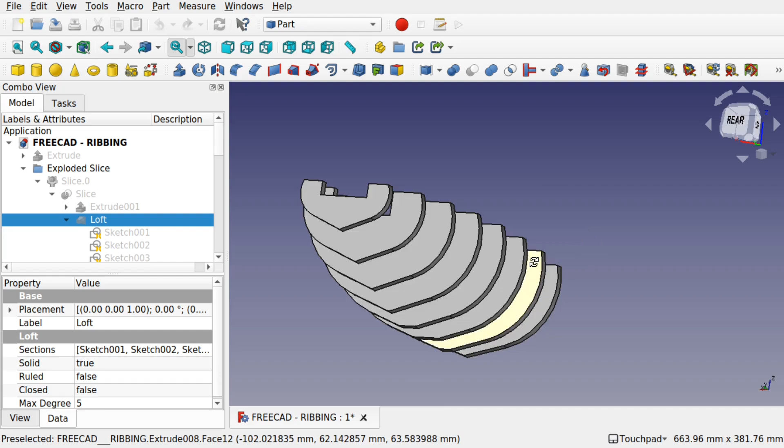Hi viewers and welcome to the channel. This is a follow-up video for the parametric ribbing that I did for one of the hulls or fuselages. This was a previous video that was uploaded where we created a boat hull and created a number of bulkheads from parametric cross sections.

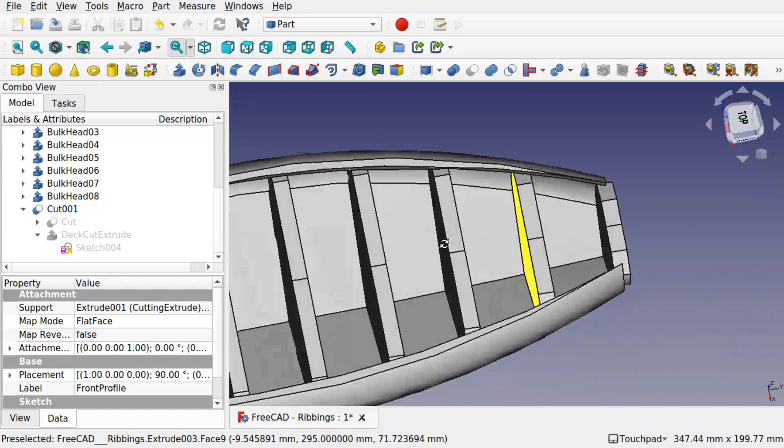There were a few questions. The first was regarding an offset. At the moment, if we 3D printed that, those bulkheads or ribs would actually be on the outside surface, showing through. We need to offset those back, and I'll go through how to do that. Another question was about chamfering each of the cross sections in one go. I'll be recreating the model from scratch, renaming each part so it's easier to follow, and showing you how to cut the top surface to expose the cross sections underneath.

There are some more questions that I'm going to address in another video. I just didn't want this video to be too long. So thank you for those questions, and let's see if we can tackle them.

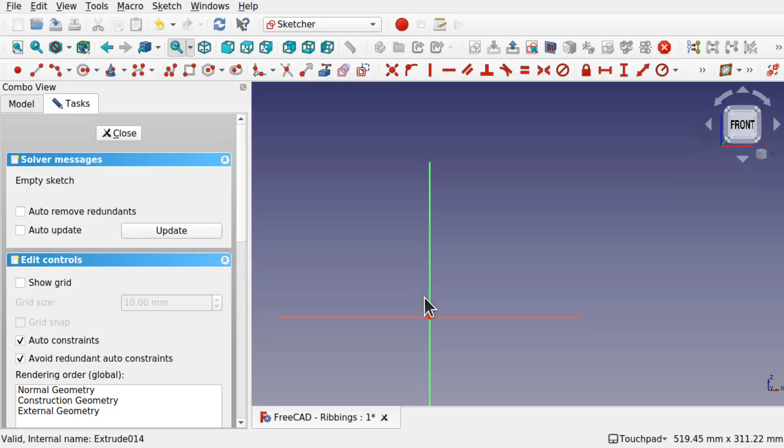On the XZ plane, hit OK, and we're going to create the cutting tool. This is just going to be a rectangle that's going to be the length of the boat. Hit escape, and we'll place some size in here. I'm going to set this one to about 200 millimeters and set the height to 100 millimeters.

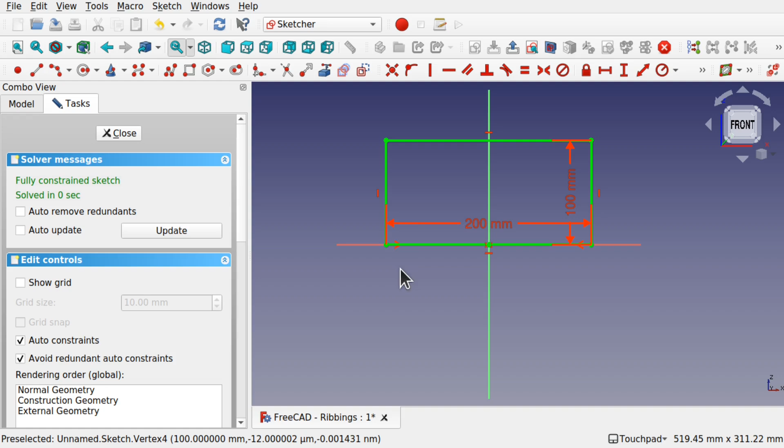This is what we went over in my previous video, and we're going to set those two points symmetrical to that center point. This is attached there, so I don't need that - click on it and delete that. There was a constraint because it was constrained to this line due to auto constraints being on. Just delete that constraint out of there. Hit close, and we've got this rectangle here.

If you want to go back to the other video, you can, just to go over that. But I'm just going to go through this quickly to create the necessary objects. Go over to the part, and we need to extrude this way. Let's give ourselves a bit of space. So extrusion along the y-axis.

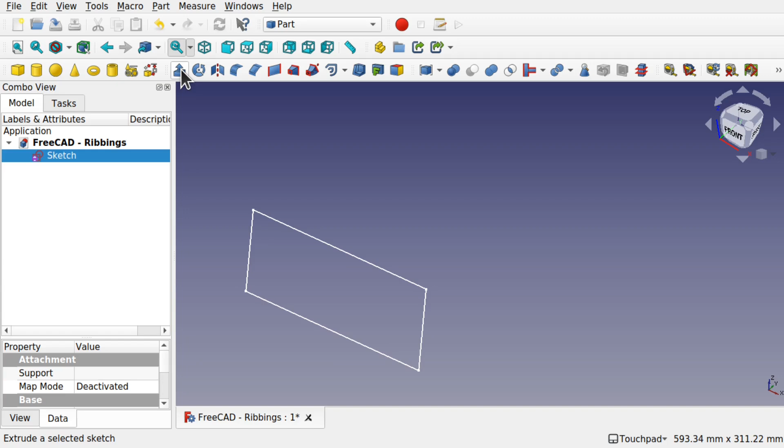I've had the sketch already selected, and we can come down and check that - you see shape sketch there. Click the y-axis, and we're going to extrude about 350 millimeters in that direction. This is going to create our cutting tool.

I'm going to rename these as I go. So this is with the boat - this covers the boat, so I'm going to call this boat coverage. We're only going to be using this once anyway, so this is our main extrude that we're going to create the cutting tool from.

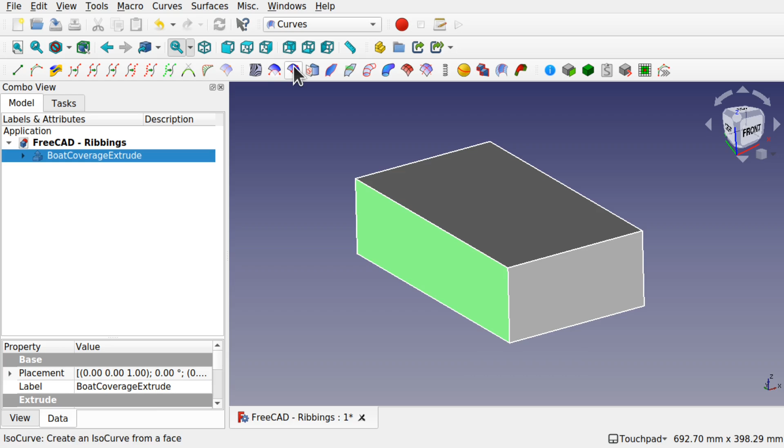Click on the side. We need the curves workbench installed. If you haven't got that, you can go over to tools, curves workbench - I've already got it installed, so tools, add-on manager there. Click on that side, click once so this face is selected, and create something called ISO curves across there. So our ISO curves have been added.

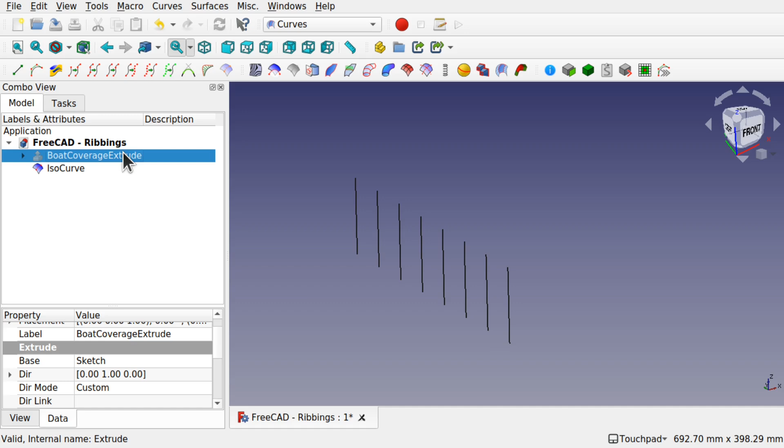This is a compound object, so I can click on the ISO curves and change the U to 0, and you'll see we just get the vertical lines. I'm going to up this to about 8. This is totally separate from the main extrude, so I can click on the main extrude, and we've got a compound set of lines there as one object, a number of edges. So with lines or edges, we can extrude them.

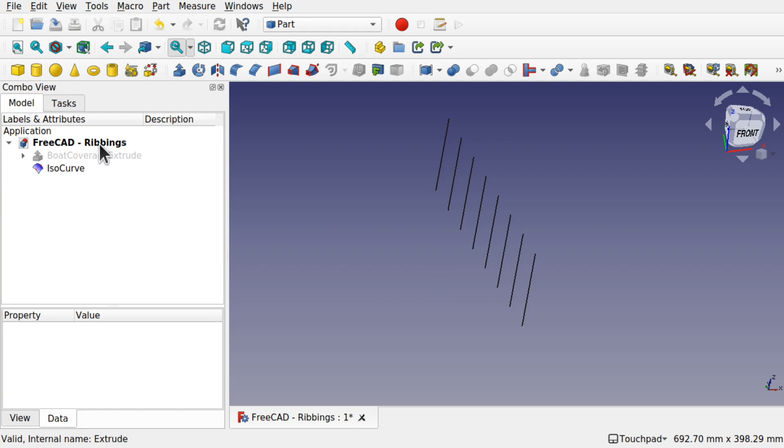Come up to the part. We're going to extrude this along the x-axis to make the ribs or the sections, bulkheads, etc. Click on the IsoCurve, and we'll extrude that along the x-axis, making sure it goes in the same direction - so 1, -1 this way, 1 this way, point of origin -1, 1. The length will be the width of the boat, which was 200 millimeters, and we've created our stations for the extrusions, which we'll use as a cutting tool.

So we've got the extrude there. I'm going to rename this cutting extrude.

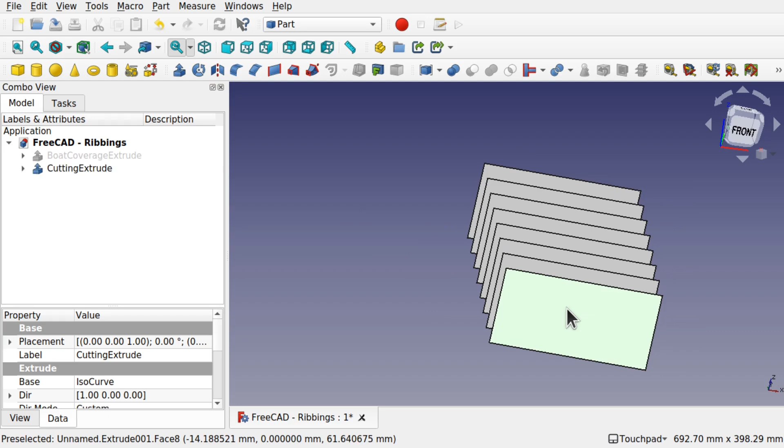We're also going to use this to sketch upon. I'm going to click this face here, click on the front, bring this in, come over to the sketch workbench. I'm going to attach a sketch to this, so make sure it's selected. Only select it once, otherwise the whole lot will select. So just select that one there. And we'll create a sketch along there. Make sure it's a flat face, okay, and this is going to be the profile of your boat. So I'm working across the whole of this rather than the half breadth, and whatever profile you want to add, make sure you keep it inside this area.

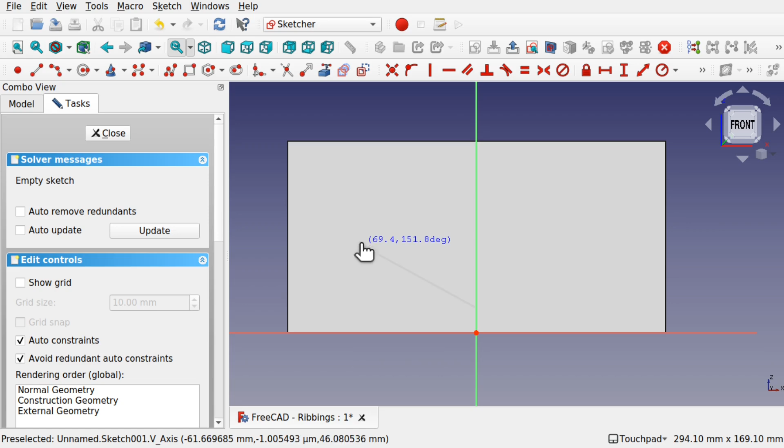So whatever method you feel comfortable with making the profiles. We will go through side profiles, doing this from the side view as well, perhaps in another video. We'll keep to the questions asked in this video first.

So we've got constraint substitution because I've got the auto constraints on, the avoid redundant constraints, and we'll just substitute that constraint there because I'll create a tangent against these two. Create a line, click on this point, create a line, and that line there. It's not attached to this one, and that's because I want to create a mirror across here.

So select all of them, the box selection, come up to the mirroring. Well, first of all, we need to select something to mirror over, so this center line can mirror over. Come up to the mirroring, and we'll mirror across there.

These two points need to be connected together with a coincident constraint, and this point needs to be connected against the center line with a point on object constraint. These two, because they've been mirrored, will be separated. So this point and this point connect together.

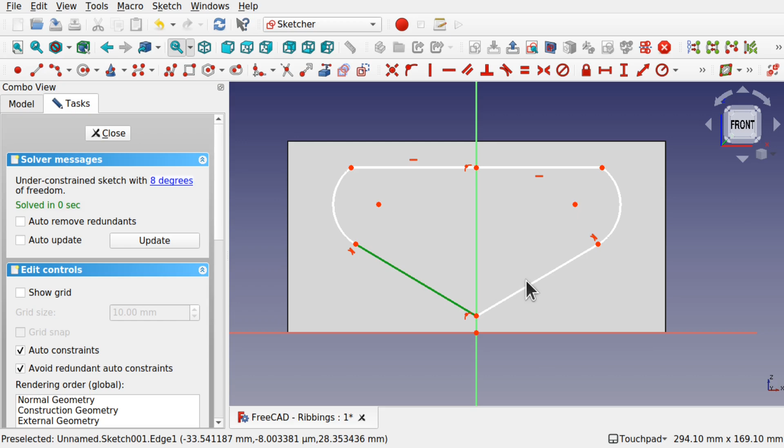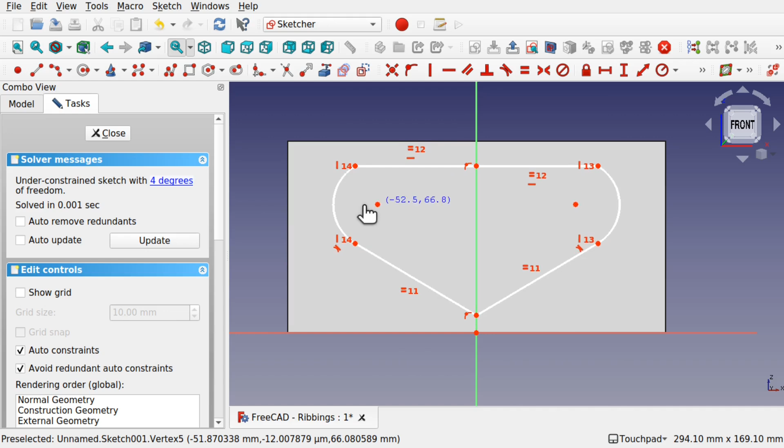Going to make sure that these two have an equality, so use equals, and these two also have an equality. And we'll take this point and put them in a horizontal constraint, and the same with this point and this point, horizontal constraint. So that means if I move these now, they will move together, which is what I want. Make sure it's inside of here.

Hit close. That's the first sketch done. So that's attached to there.

Now I'm going to duplicate that sketch. This is the back. Let's rename it first, back profile. Now we can either come into the sketch, come up to edit, duplicate selection. What it's attached to, it's attached to the cutting extrude. Just uncheck that and that will leave that back profile there.

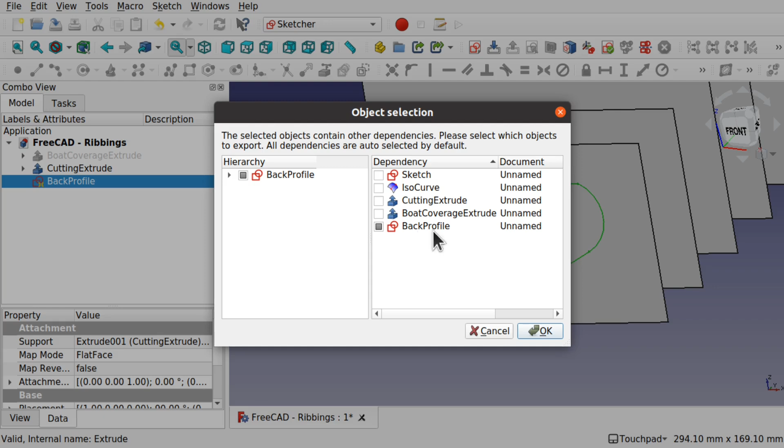Or we can disassociate it with this face by clicking on the back profile and the support, coming into the support, clicking on that, and hit clear and hit OK. Because I've disassociated it with that support, you can see that's clear now. I can click on that and hit edit, duplicate selection. It'll just duplicate up. So edit, duplicate selection. I've got 3 of them.

This one's going to be the middle. Right click, rename middle profile. And this one is going to be the front. Right click, rename front. We're going to change what they look like in a minute.

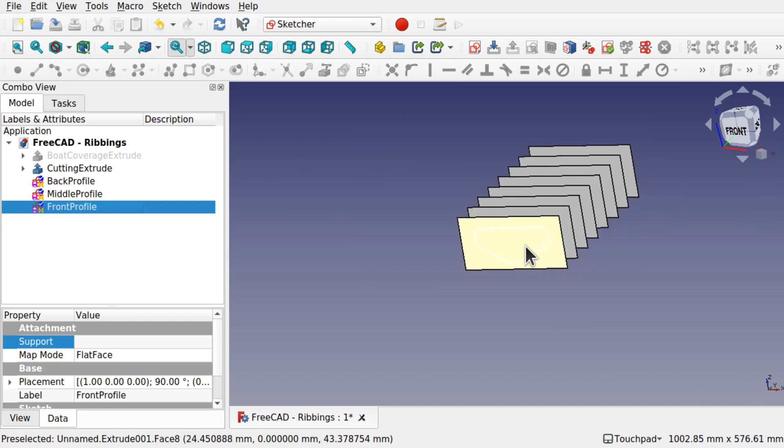Now we associate them with the stations. So we take the front, click on the front, the support, click on the button, and we'll move this over to the left and click that front support there. Hit OK, and you can see there's a sketch on that face now.

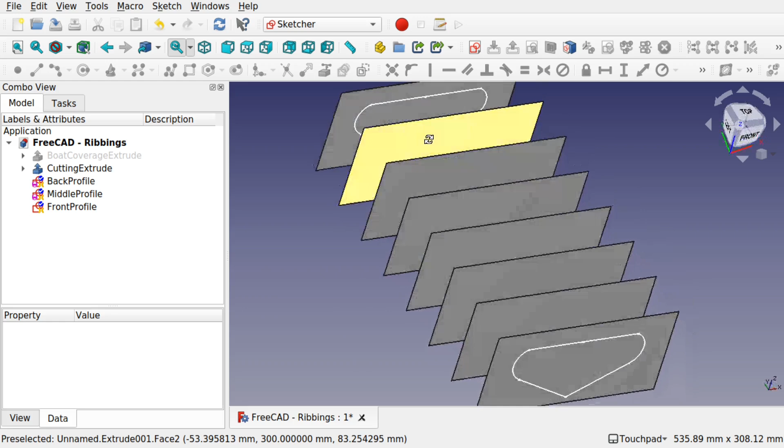We'll do the same with the middle, support, and where we're going to put this one, I'm going to put it about here. Okay, that. So we've got those 3 going along there.

Let's change these slightly now. So I'm going to come to the front profile, double click on it, and we'll come in. And we can't see that at the moment because we need a section view. There we go.

And we'll change this. So I'm going to push it up. I'm going to bring these in as well. So I'm not dealing with the point of the boat. If I wanted to be dealing with the point of the boat, I'll create another one behind here and have it going into that point.

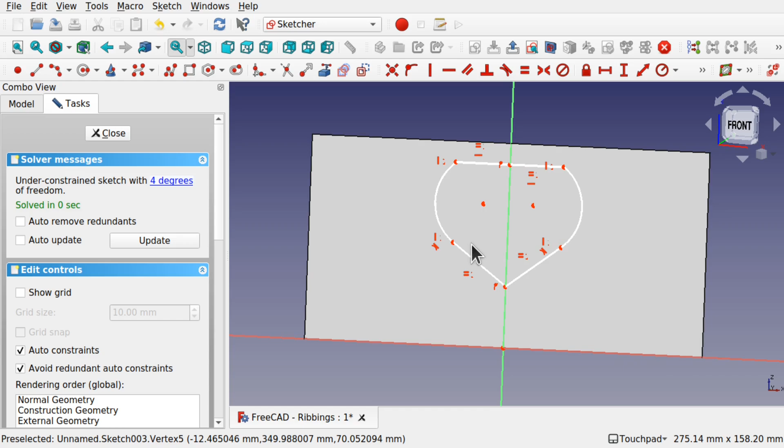Hit close, so we've got that one there. Might be a bit circular, but that's fine. And what we're going to do is take this middle one and change that slightly as well. So section view, I've got this one here.

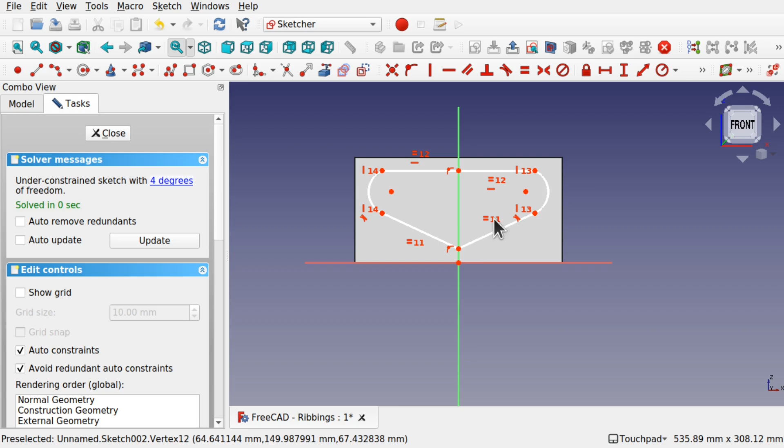Just bring this up a bit wider. There we go. So we've got medium, wide and small.

Now this is where I created the loft before going through here. I'm not going to create a loft going through here just yet. What I'm going to show you is how to offset these, because we're going to create two lofts: the outside and the inside loft.

Click on the back profile. So we clicked on this one, and what we're going to do is move this inwards, offsetting it by creating another object from this one. For that we need the part workbench.

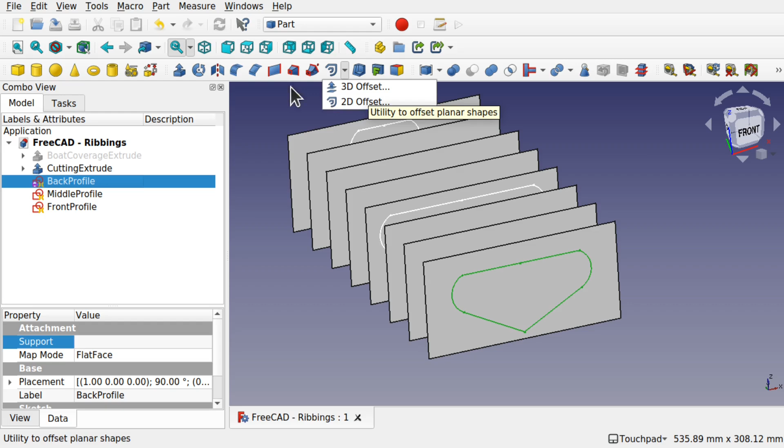Now I'm in the part workbench, I've got that back profile selected. I'm going to use this icon here. When you come in, it's normally set to 3D offset, but we're going to use a 2D offset, also available from Part, 2D offset. This creates a 2D offset.

If I set it to a minus value, it goes inwards. We'll increase this by about 3, and you can see that offset in there. If I zoom in, you can see that there.

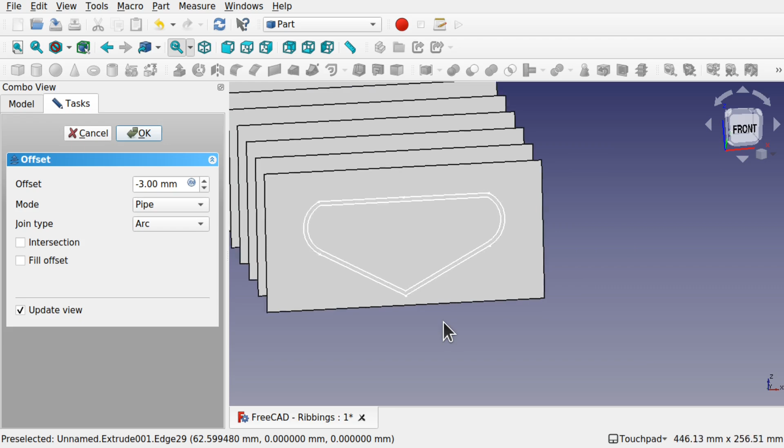So what we'll do is create a loft with the outer and a loft with the inner, but use this cutting surface to cut the inner loft. Hit OK. That's in there.

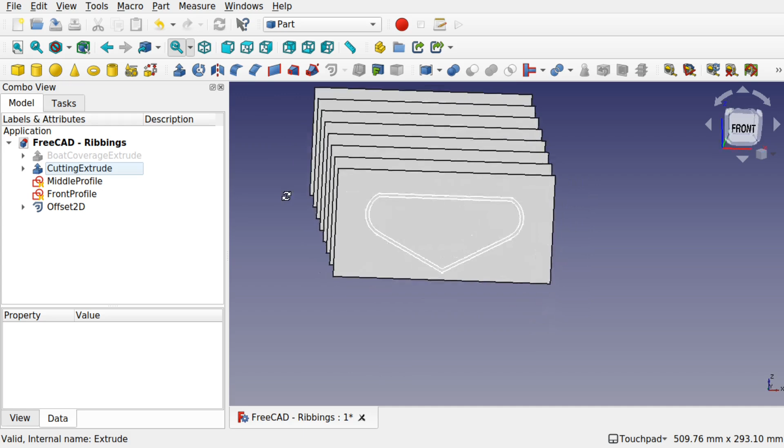We can do it with the other shapes now, so we come around and have a look. So we've got this one in here. We can click on that one, or click from the middle profile here, and use this tool here. Set it inwards. You can change these to whatever you want, even change the offset so it differs from the previous one.

The arc and tangent options mean that if it's arc, you'll get more curved offsets, so if the edges connect, they'll be curved. Tangent means they will follow the original offset.

Okay, and we'll do the last one. I should be renaming these as I go. Let's rename the last one, this one here - offset - and we're doing -3 on there as well. Okay, so we've got this one.

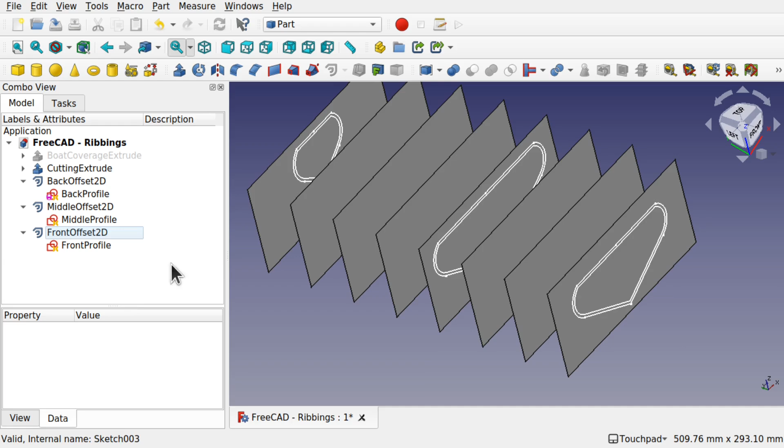So what we have now is a cutting tool, a back offset, a back profile, and the same for all of the rest. So if we expand these, so we see them all, we're going to create lofts through here now - two lofts.

Click on the utility loft and bring in the back offset. So we'll do the offsets first: middle offset and front. And we'll create a solid from those. Hit OK. That's our first loft - this is our inner loft.

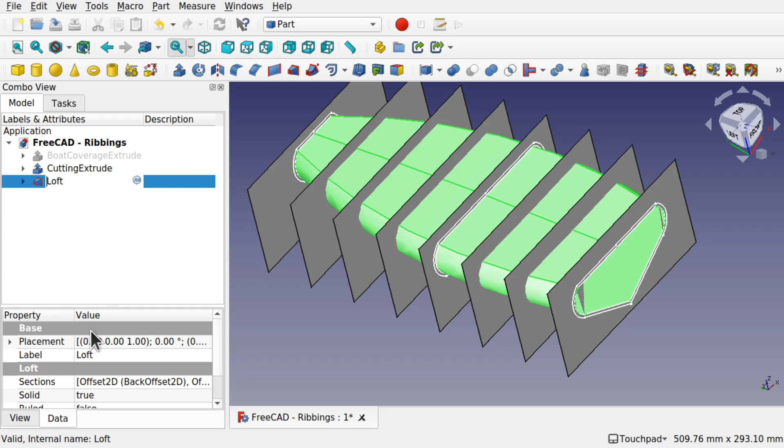Now nesting inside the inner loft, you'll find the offsets. We're going to press the spacebar on these offsets to hide them. And nesting inside the offsets, you'll find each of the original profiles - the back, middle, and the front. Just going to keep those visible for the time being.

I'm going to split the inner loft now with the cutting tool. So select the cutting tool first, then control select the inner loft. Come up to Part, Split, Slice Apart, and we slice those apart now into the exploded slices.

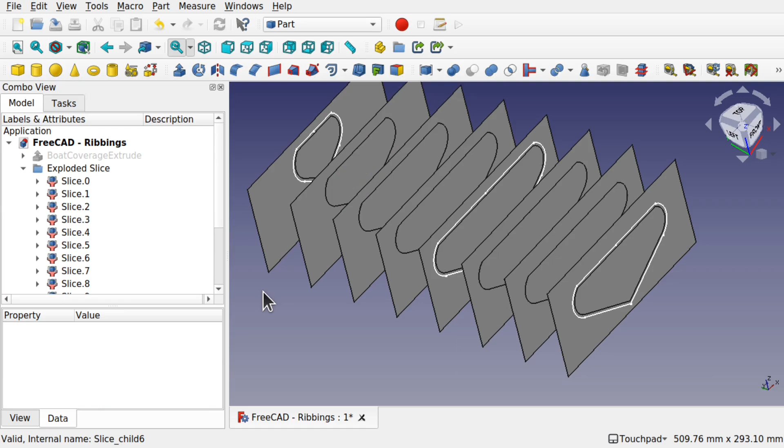And you can see that we've got all the faces inside there. We can control click all of these because these are the ones we don't want. Like so - press the spacebar to get rid of all of those exploded slices.

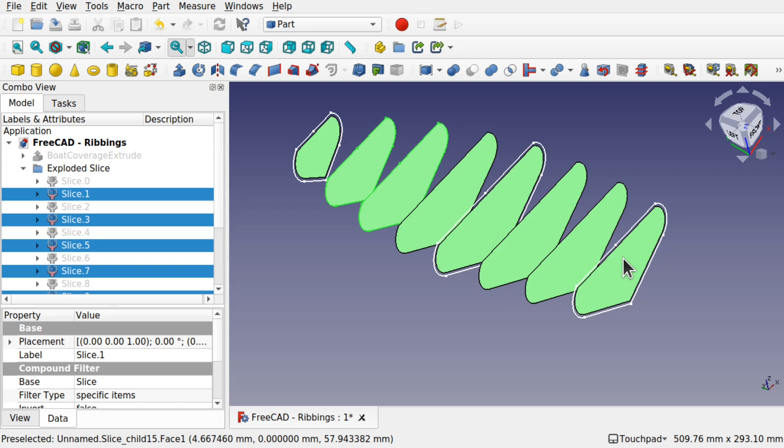If we select the others, so the inner parts, we can control select them from here, or control select them from here. And we'll extrude those along the y-axis. Go for 10mm. We can do symmetrical, so they sit over here if you so desire. Hit OK. Those are all in there now.

So let's hide those exploded slices, and we've got these individual extrudes. We can name these bulkheads, ribs, whatever you see fit. So I'm going to quickly rename these now.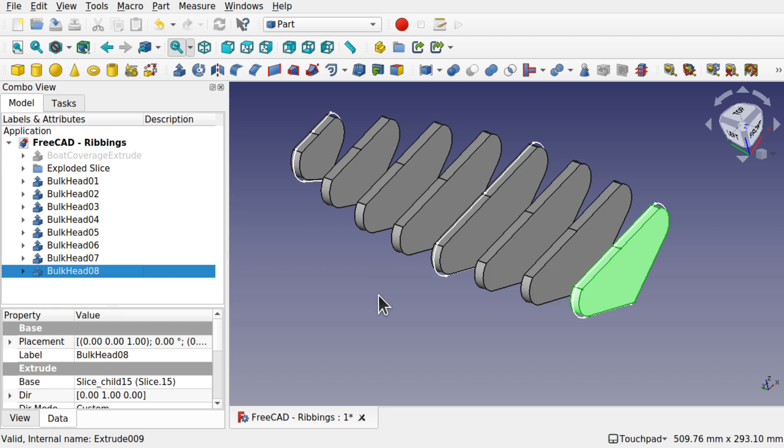I've just renamed all the bulkheads, and we can still see the sketch inside there. If we come into the bulkhead, you can see we've got the slice and we've got the inner loft that sits inside there.

Now this is where the problem comes in, because that loft, if we wanted to 3D print this with these inner parts, and if we take a section out here so we can see these ribbings going across, then these are going to show through. Or if we're trying to make an actual physical object out of this, then these are going to poke through. So how do we solve that?

Well, we're going to extrude the actual original sketch, because we created the sketch from the bulkhead, which was part of the slice. See the slice in there, got the inner loft in there. As you see in bulkhead 01, 02, this will be the same in all of these - the slice, and then the slice again, and the inner loft. So that inner loft is the same object throughout.

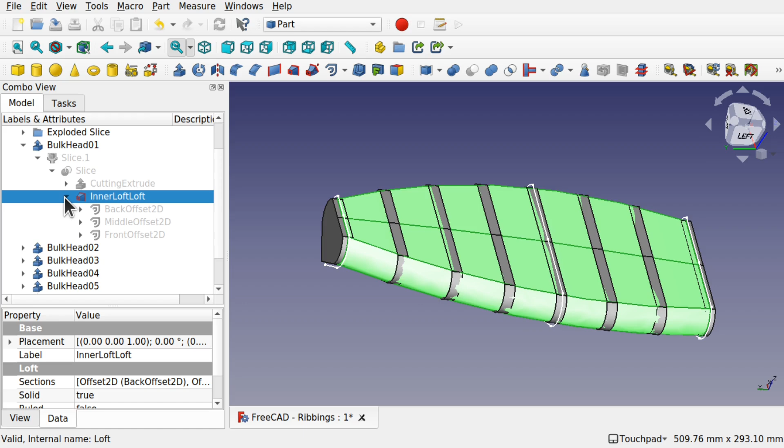You can see when I press the spacebar on it, it just disappears. So just pick one - I'm just going to pick bulkhead 01. Extend it out, extend out the offset, because the offsets are in here. You see the sketches are in here and they're still visible. That's why they've got the white around the outside. What we can do is create a loft from those sketches.

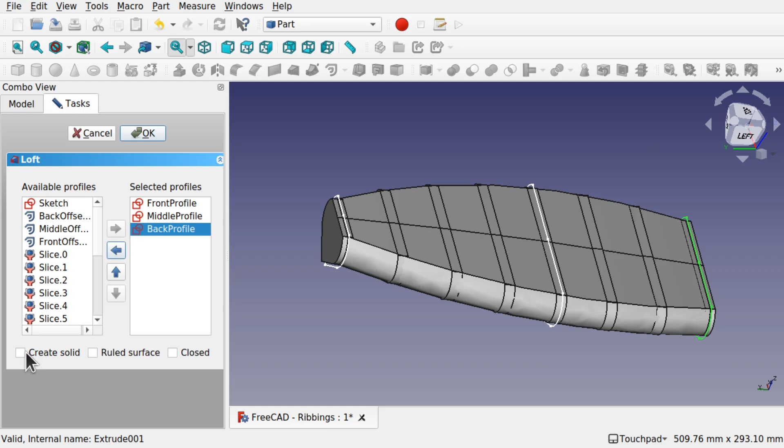So let's create utility to loft again. And we'll select the front, bring that in, the middle, and the back. So they must be in sequence. Create a solid, hit OK. And now that's lofted outside and round those extrudes.

If you still see them poking through, then you can adjust each of the offsets and just bring them down a bit by the value. So if I bring this up, you can see the value in there, -3. So we can change that if we so desire, and that will change the loft underneath. So if I set -6 on here from the middle profile, then that will actually move that -6 inwards.

And let's go 6, and what will happen is you'll see that will poke them out there. So we've got full control over the inner profiles, like so. And what you'll see inside is that we've basically got the outer loft, the inner loft, and the profiles.

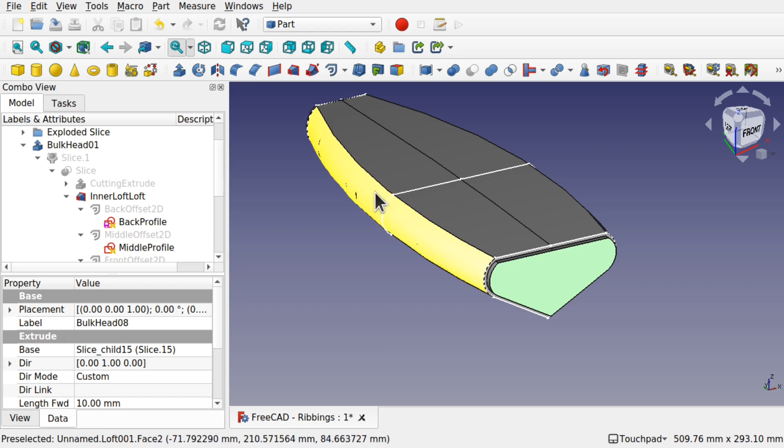They are all solid, so we've got 2 solid objects in here. So we can take the one we want to keep, which will be the outer loft. So this one here - rename it outer loft.

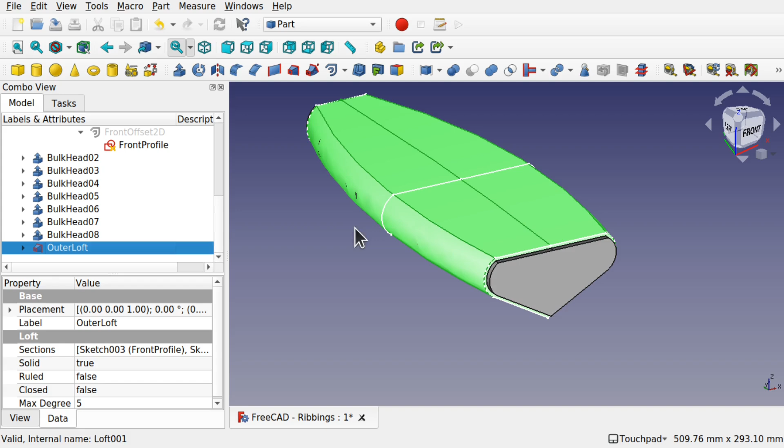Let's bring this around. See, we've got some artifacts there, and that's because we go to the offset. Let's just move this inwards, say -4. Now we can do the same with this one, -4.

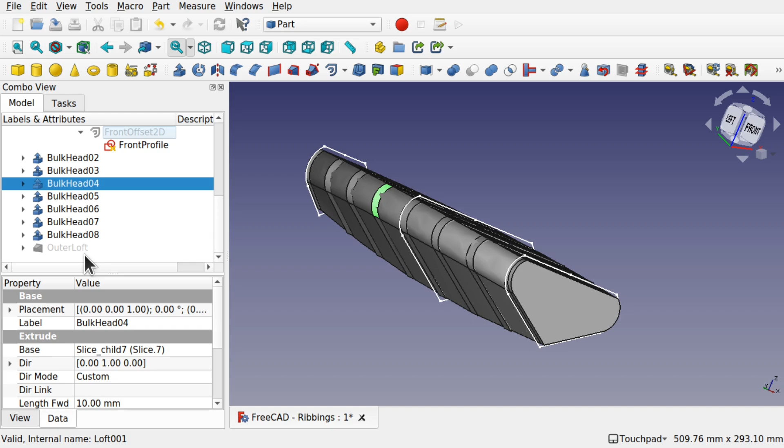Just those in there. So you can see you've got a refresh that needs doing. Edit, refresh - that's pulled those in. There's a little tick by them saying it needs refreshing. Let's have a look at the outer loft now - so that's nice and clean across there.

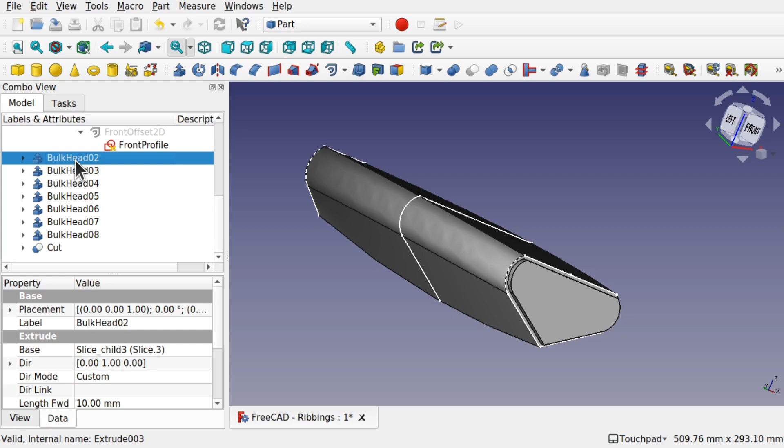So going back to what we were saying - one we want to keep, one we want to remove, which is the inner loft. Control select both of those, and we can use a cut or part boolean cut. And what will happen is that if I hide the bulkheads, press the spacebar, that's cut right the way through there. So we've got those going through there.

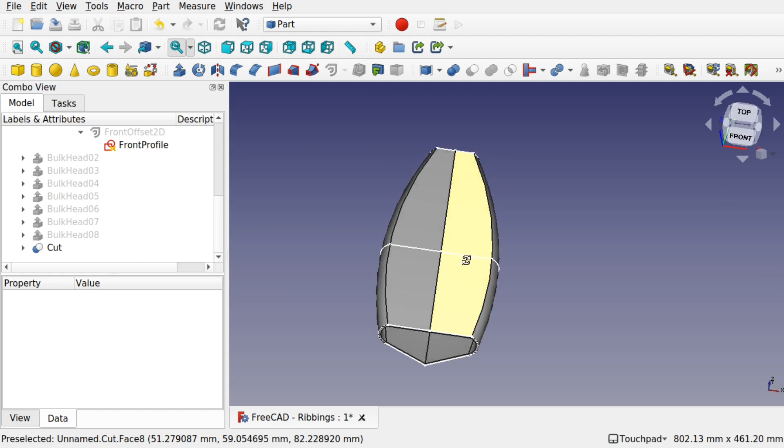We've got one of the bulkheads still showing here. Let's press the spacebar on that - so we've got a hollow there. We can take the top off if we so desire as well. So now we've got that cut. We may want to take away part of the top as well.

So I can click on top and create a sketch upon this. Let's click on the sketcher, and we're going to just place a sketch along the XY plane. So I haven't selected anything, so I've placed a sketch upon there. And I can move that up, or I could actually attach it to this surface here, depending on if this is a flat surface, if you're worried about topological naming issues.

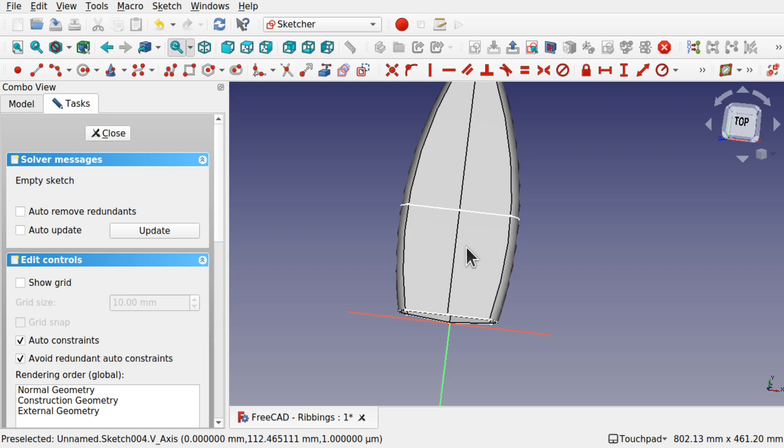I personally will just attach it to here and sketch upon there, because if I change anything underneath, I'll just reattach it. That's the way I work. And at some point, the TNP problems will go away from FreeCAD. We've already got link stage 3, so at some point it will go away and we don't have to worry about certain types of attachments. Even then, if you're managing your model well and you understand how to reattach those sketches, you'll be aware of those issues and you can go back and fix them.

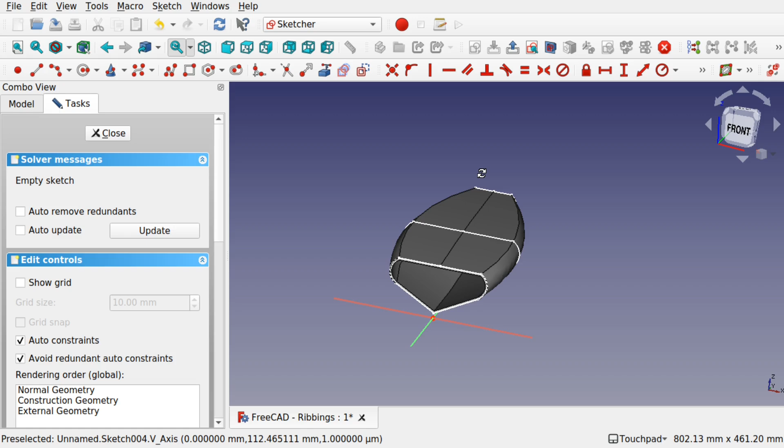So for this instance, I'm going to look at this and just let's bring this sketch up a bit. So come on to the sketch, that's the placement position, and we can change this along the Z axis, so we can move this up.

So you've got a bit of curvature going across here. If I look at this, we wouldn't be able to attach a sketch upon here unless this was flat. It's not a planar surface. So we're going to go for this method for the time being.

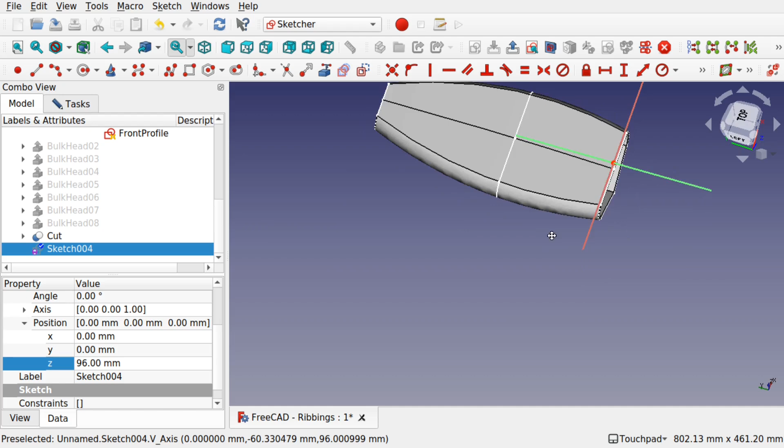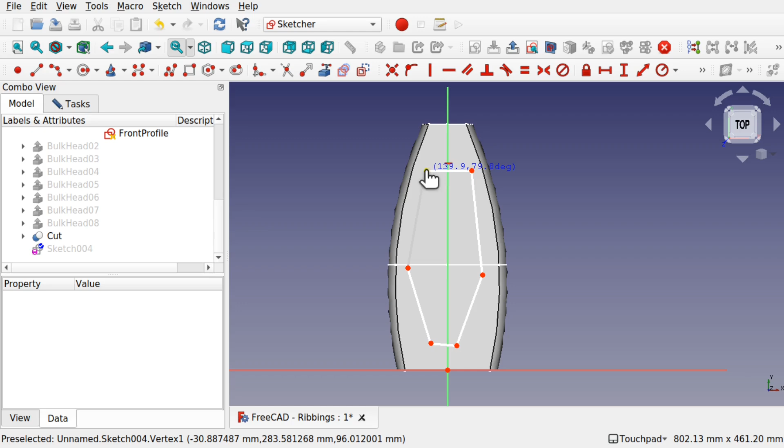Let's come up to the top. What should we create? I'm just going to create a simple box in here. Now let's go for the polyline and take out a nice section like so, hit escape, bring those in line with a horizontal constraint, and same with these two. Actually, let's make this one straight horizontal in there, and I could do symmetrical across there, but I'm not going to bother. Hit close. So we've got those now.

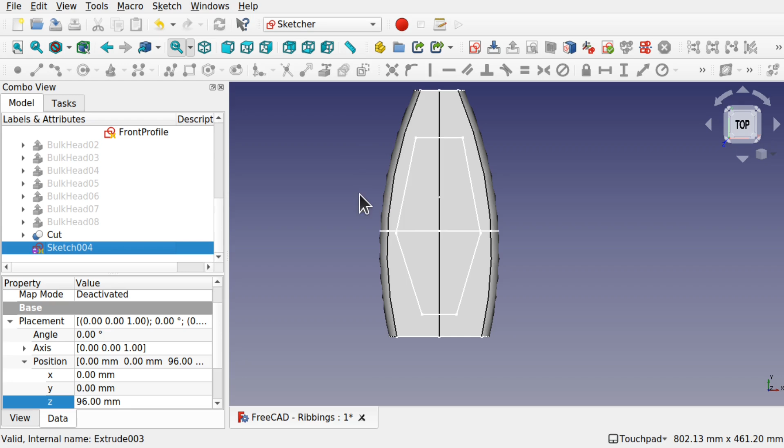Come over to the part and we'll extrude. We're looking along the Z, looking along the Z, minus 1 so it's going downwards, and set this to about 20. I want that passing through there. One I want to keep, one I want to remove, and we can do a cut. So that's cut into there.

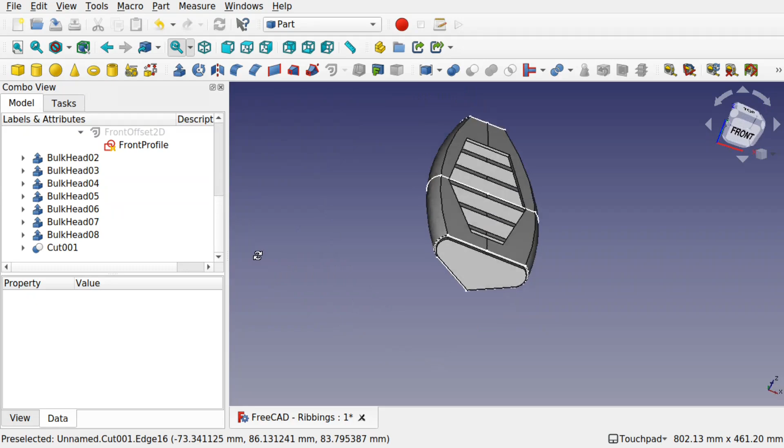So now I can bring back the bulkheads and we can see those running through there like so, and we've got a nice smooth surface running around the outside. You can see through there, and we've got all those inside there. So nice and smooth.

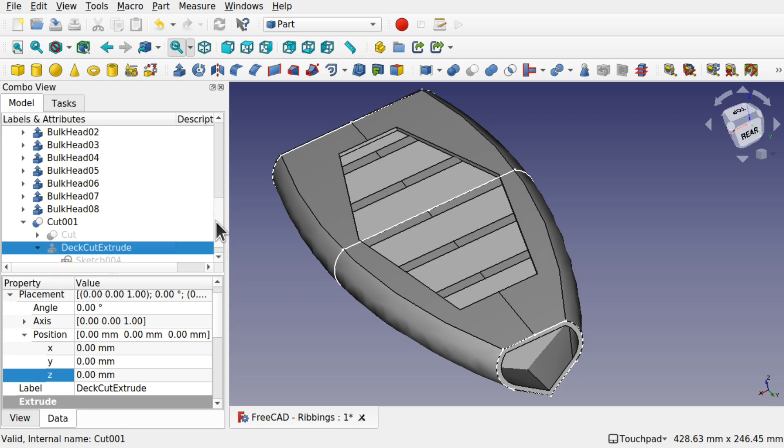Now let's change this slightly. So we've got these running through here. I'm going to change this cut. Come into the cut, got the extrude which was our deck - this was our deck cut extrude. Inside there we've got the sketch. Double click the sketch, we can see that sitting there.

Let's come to the model. Got the bulkheads going through, and what we want to do is find, come into the cut, we've got the inner and outer loft. So there's the outer, press the spacebar, bring that back, and we can see that along there. Let's do something different. Let's delete these. What I'm going to do is chamfer this loft. And that's going to cause a bit of an issue.

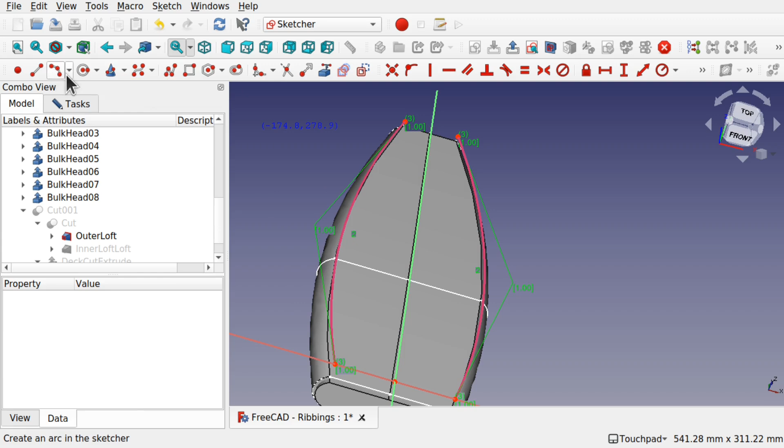And we're going to need to do some model management in there. So this time I'm going to create, let's bring in an edge. Let's bring in this edge here, and this one here. Let's go for the curve. So drop this down, and we're using the endpoint and rim point 1. Come in, attach that point to there, that point to there, and we'll just touch that one.

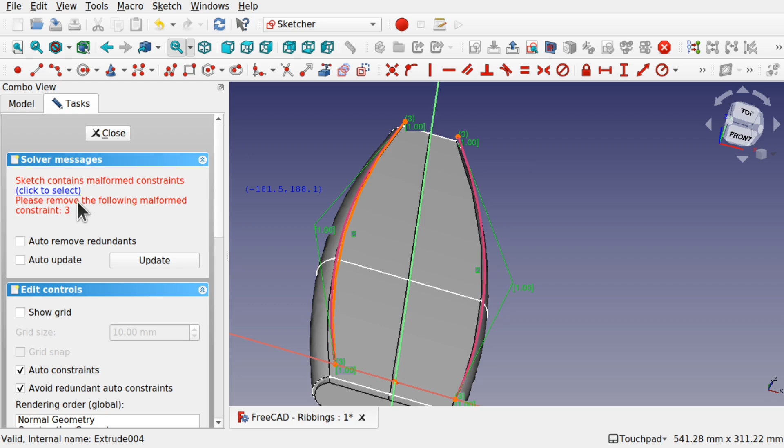So we've got some problems. Hit the tasks, got malformed constraints in there. Click to select and hit delete. So that tangency didn't work. So what we'll do is this time click that line and click this one, so we click both of them and do an equality. We've got a B-spline, so the B-spline connections there. I'm just going to put this close to it. At the moment, B-spline tangency or equality is not supported in FreeCAD as of yet.

We've got that one there. I'm going to take that one, control click the center line and mirror that over, and take a line across. Now, do I want a line across here or do I want to bring this down? Let's place a line across here. So this line going across here, like so. Those should be connected - I don't believe they are... yep, they are, that's good. And a line across the bottom as well, so this point and this point.

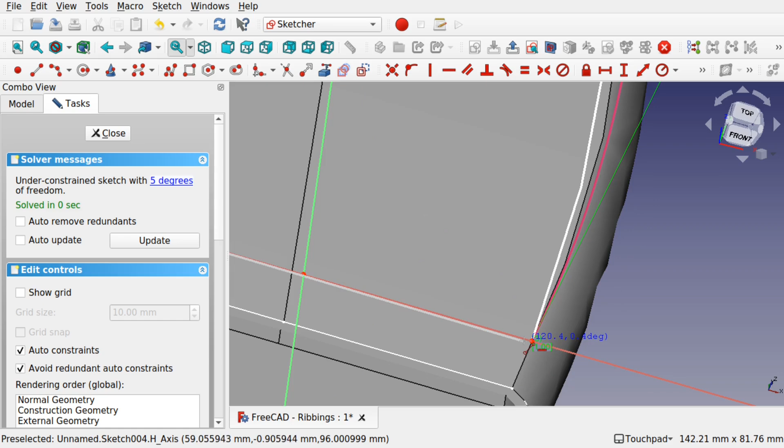Hit close. Let's come down. Hide that outer loft. That's cut through there because we've taken the original sketch and just cut into there. So we've opened that up. So now we've got the boat.

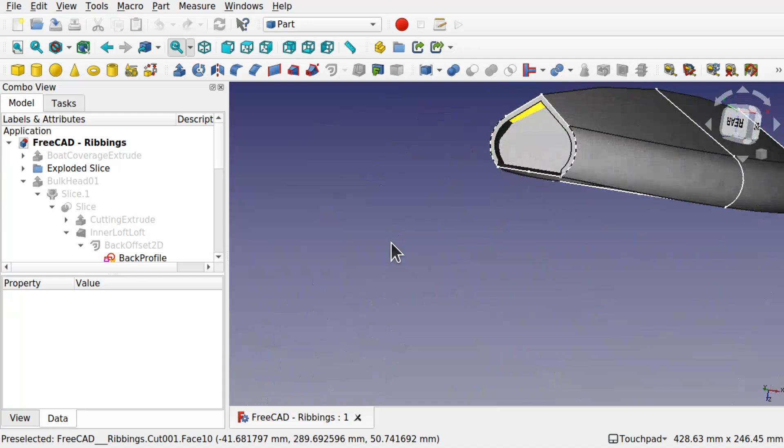What I'm going to do is try to chamfer some of these in here. So you can see we have these bulkheads in here. We can actually chamfer these off either after the actual loft or used in the loft itself. For that, I'm just going to get rid of the original cut just to make it easier to see what we're doing, and also this deck and the sketch. So we've got the cut in here.

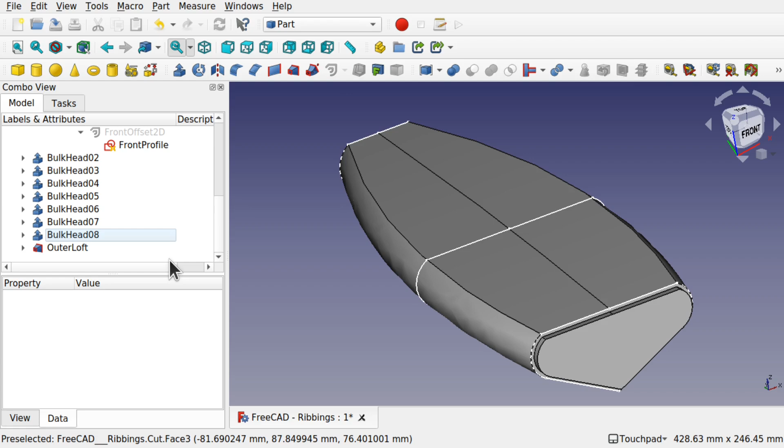We're just going to delete that one as well. So we've got the outer loft and the inner loft. Remember, the outer loft is just used as the skin. It's the inner loft that we want to use - so this one in here, the inner loft.

If I click this edge of the inner loft, we can just chamfer that. So come up to the chamfer tool and we get that edge there. We'll look along, see the edge has been selected, and we can chamfer it by something like 5mm and hit OK.

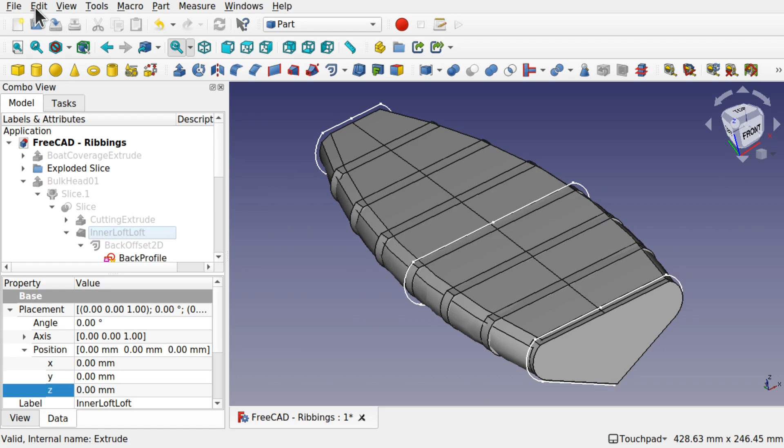We get that chamfer going along there. And if you look underneath as well, just make sure it doesn't need refreshing, which it doesn't. You can see that chamfer is taken, but the extrudes haven't changed. Now why is that? Well, that's because our chamfer has been made as a new object now. So this is our chamfer.

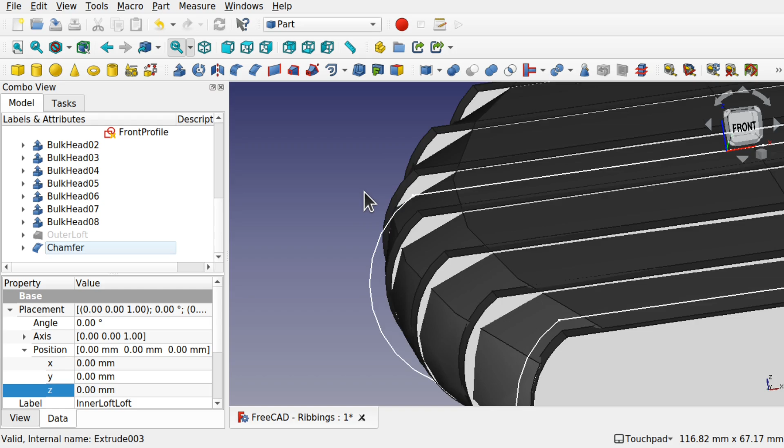Let's make this a bit more. So let's make this something like 8mm and hit OK. So we've got 8mm chamfer going all the way along here.

The question is, will it cause us a problem when it comes to here? It shouldn't, because our profile is big enough there. That's good. Matter of fact, we can't see that profile. Where's it gone? Yeah, it's the bulkhead. There it is. So that'll be chamfered there. So we've got that chamfer on there, but it hasn't affected the original extrudes.

That's because when we created our slice through here, there's the chamfer. Well, this chamfer is a new object. It's not part of the original slicing. Now this is where model management comes in. We've renamed these nicely, or most of these anyway, except for this chamfer.

So how do we apply the slice to the chamfer rather than the original loft? Because if we come into the chamfer, you can see we've got the inner loft inside. This one here, the inner loft, which has been chamfered, so we've got a chamfered inner loft. So I'm going to rename this.

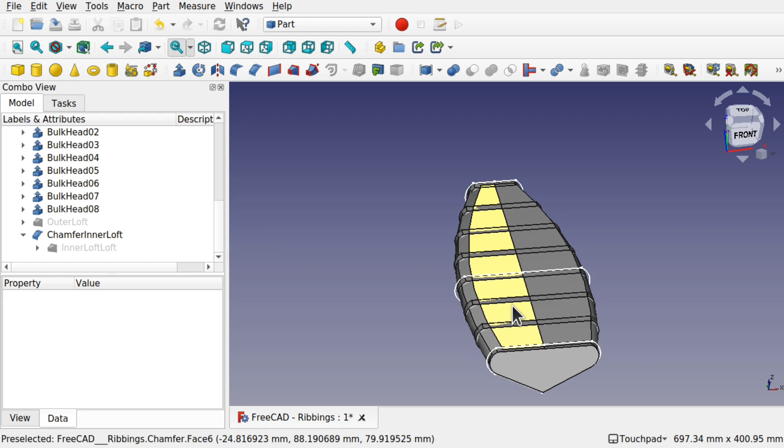Just be careful, because we're creating more faces on here. So if we start attaching items on top, we may get into the topological naming issue, if that still exists at this time of speaking. Personally, I would just go in and change the attachment of any sketches that are attached on top of here if we run into that problem. It's all to do with managing the model, understanding what's been created, and just keeping an eye on your model.

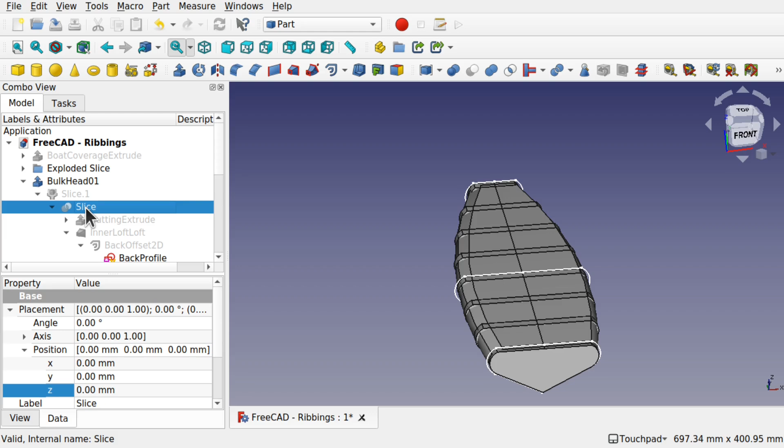So we've got the chamfer along here, the chamfered loft. I need to get this onto the slicing tool. Remember, we used the slicing tool, which was up here. So we've got the bulkhead, which has a slice, created via the slicing tool, this one here. So we've got the slice here, and if I come into this slice, we can see the cutting extrude, which is this one here. Let's have a look at our data, see what we've got.

Click on the slice, we can see we've got a label slice, the base, which is the cutting extrude, the tool, which is the inner loft. Now we've just chamfered the inner loft, so what we can do is swap these out. So we've got the loft here, the inner loft. Let's click on this button here, and instead of selecting the inner loft, let's clear that and select the chamfer.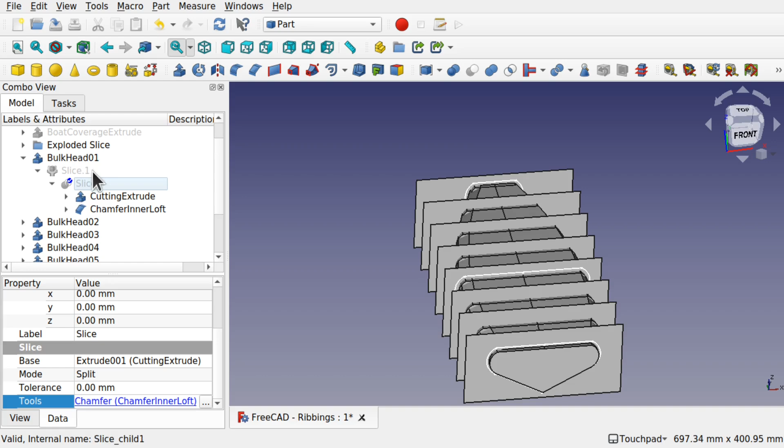Hit OK. That chamfer has been moved now, and it's been dropped into this slice. So you can see the tools that have been used. We've got the cutting extrude and the chamfer. We've got a tick there, which means it needs refreshing. So edit, refresh. You can see that chamfer is taken across all those edges.

So let's hide the cutting extrude and also hide the loft. One side of this is now chamfered all the way across there.

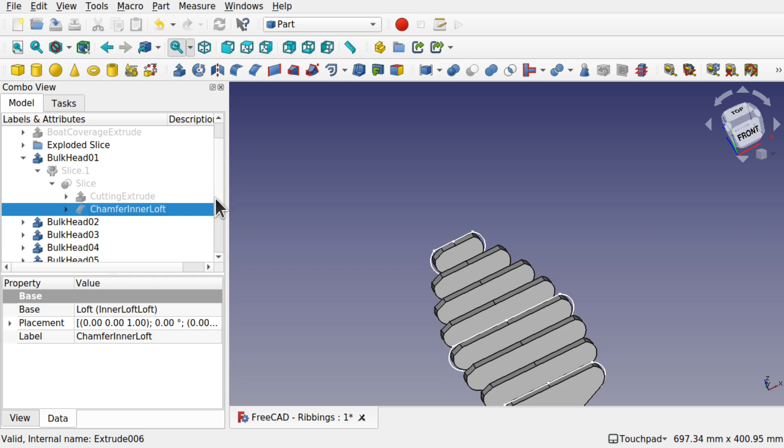And anything we do to that chamfer -- so I want to actually add the other edge in, we can double click on that. If I did another chamfer on here, then I would have to pull that in, or any other operations, if I wanted that to affect the extrude through here. So I'll double click on that chamfer, and we're going to go for this edge as well.

Let's come in, let's have a look, see if we can get that edge. There is this one here. That's edge 12, and hit OK. Now we need to change the size of the chamfer, because at the moment it's only changed it to a 1mm chamfer. So let's change that to 8.

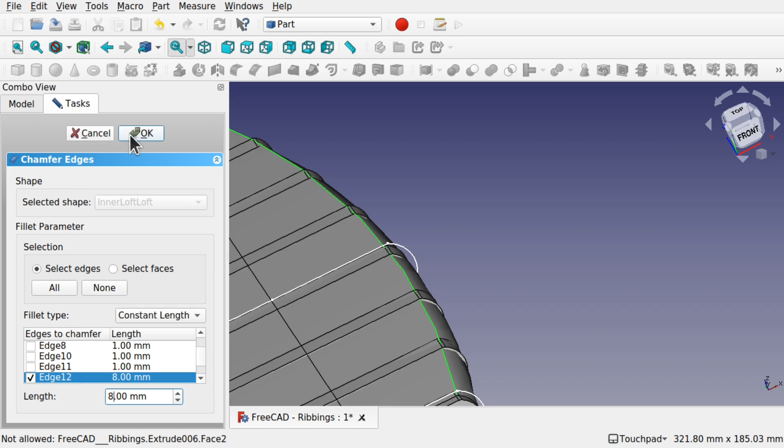We've got the chamfers going across there. Edit, a refresh is OK. And now if I hide the loft, you can see the chamfers have gone all the way across there. And bring back the outer loft, and that's all fine there.

So now if I wanted to, we can create the cut in here. I didn't really need to remove the cut from the outer loft. So if I cycle back a bit, Control Z, there's the chamfer. There's the chamfer there, Control Z, inner loft, which is this one.

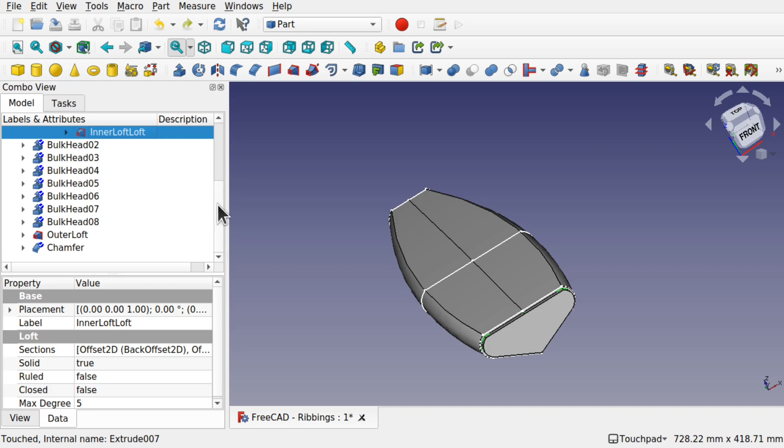Outer loft, the cut. There's a sketch, which goes on top, Control Z, and we're back to where we started. Let's try that against this model.

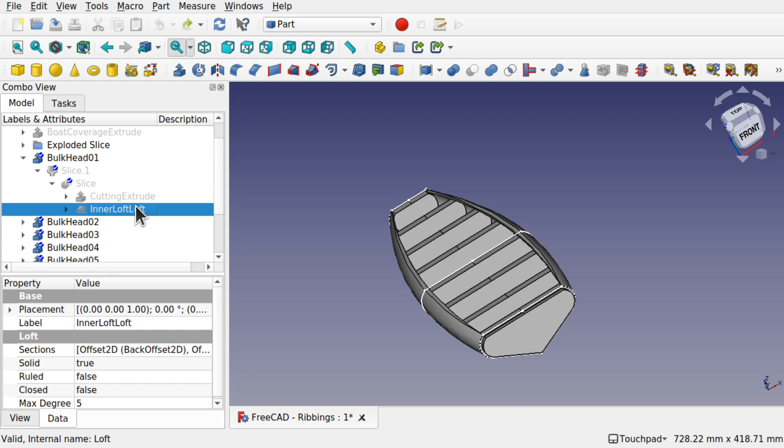First of all, we've got to get our bearings. So in one of the bulkheads, we've got the slices, that slice, and that extrude, and the inner loft. So it's the inner loft that has created the bulkheads. This is why I've renamed them, because it can be quite confusing. Working upwards, our inner loft has created the bulkhead.

Let's just hide this outer loft to get to the inner loft. Let's add a chamfer on that. Fillet or chamfer, and we'll pick both these edges. Got two edges selected, and we'll have the 8mm chamfer there.

That chamfer has now taken. The cut wouldn't have changed, so the cut is still there, so that's fine. Now we've got to add the chamfer to the cutting tool, which is the cutting extrude inside this bulkhead.

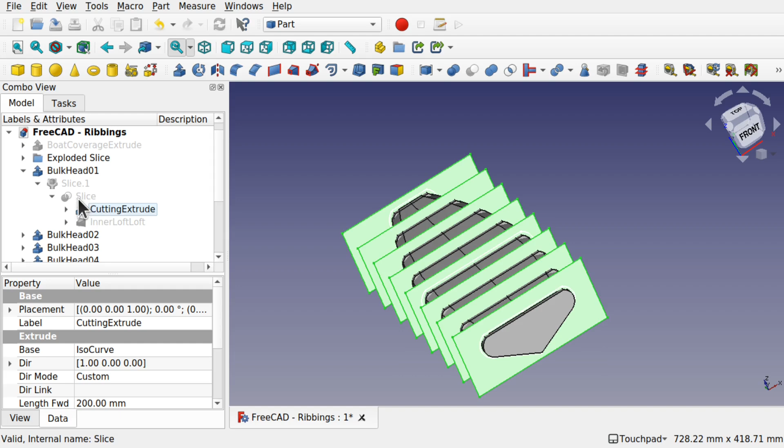So this one here, we go to the slice above there. You can see that slice that's been used as a cutting tool, tools the loft. Let's change this to the chamfer. Clear—let's remember to clear, because we can add multiples in here. Hit the chamfer, hit OK.

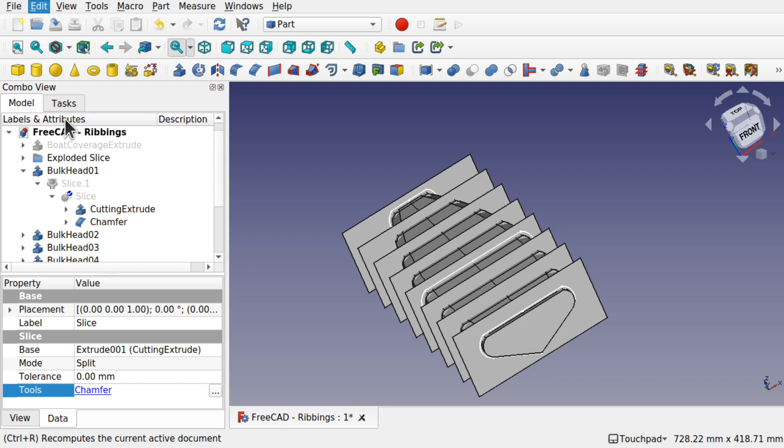Edit, refresh. Let's hide that cutting extrude. Got the chamfer in there. That's been applied to each of those ribs or those bulkheads.

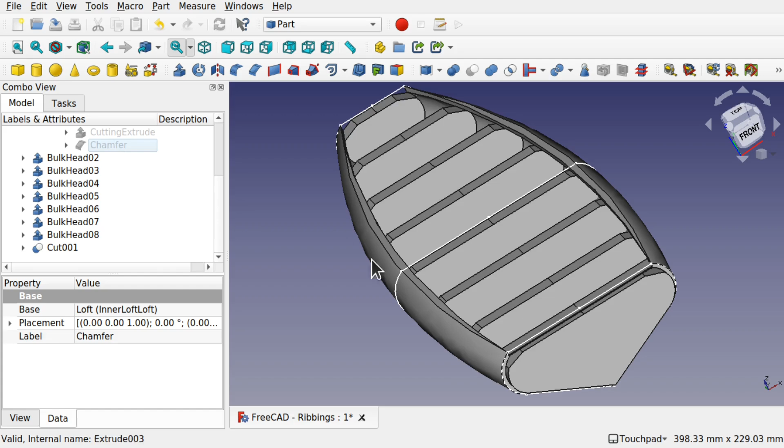Let's have a look at our cut, and also hide the chamfer, so we can see now we've got the chamfer inside. We've got the whole extrude. We may need to extrude because we've got this plank here that goes across, which is part of the cut.

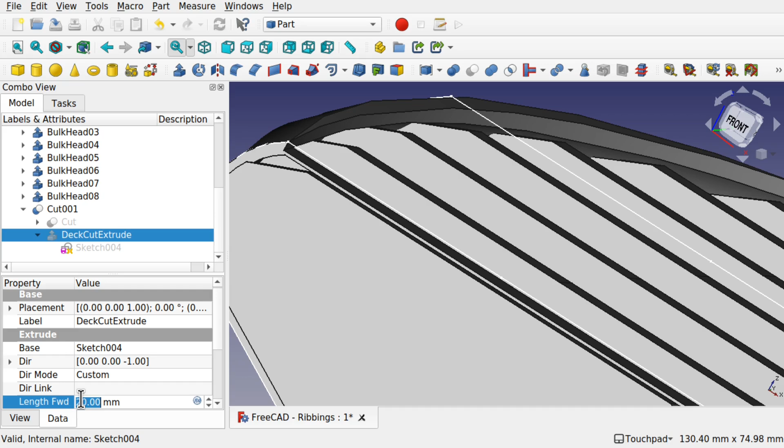So it looks like what we need to do is come into the cut and look at that deck cut extrude, that one there, and we've extruded that 20 mil. So that deck cut extrude—I don't want to transform it—length forwards, let's change this to 40 millimeters.

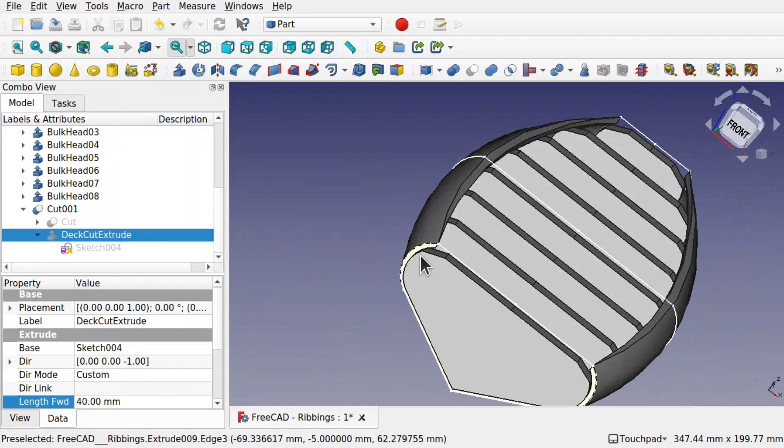There we go, that's removed that now, so that's gone right the way down and it just cuts into that loft. That's removed that part away from there now, because doing the extrude we've actually made some space in there.

We can click on that sketch and press the space bar to get rid of these sketches so we can see these sketches in here, press the space bar. So now we have that chamfer that's taken effect right across that model, and the bulkheads in there.

It's all to do with model management and understanding what makes up each of the parts and working our way backwards. This is why it's always handy to rename these. I don't normally do it in my videos because I try to keep them quick, so I'm taking account of some really nice feedback from one of the viewers. They've said about renaming stuff, and it makes it a lot easier for viewers when I go into something a bit more complex like this.

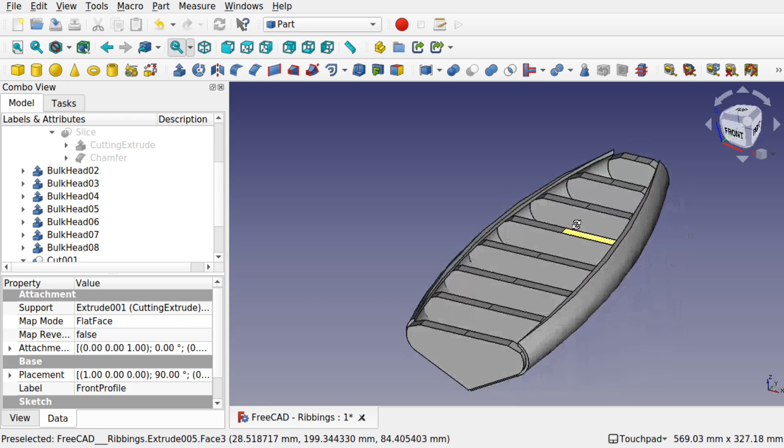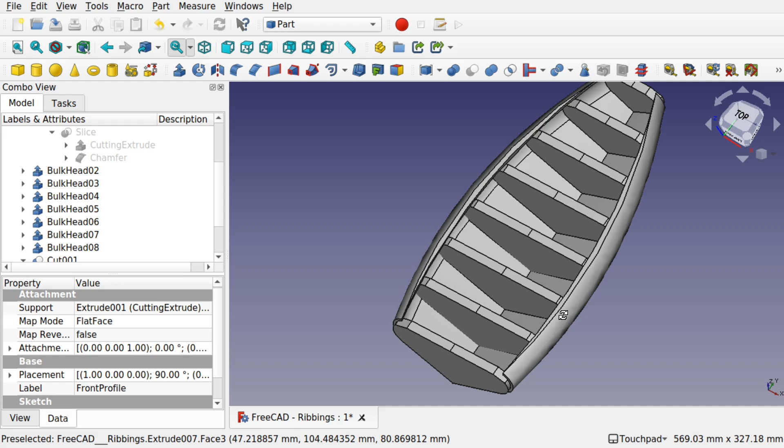So this has hopefully answered 2 viewers' questions so far: how to offset the extrudes and how to chamfer these as one. If it hasn't, please let me know and I can solve those. I will get to the other questions regarding this, but if I put them all in one video it's going to be quite long. I just wanted to solve a couple at a time to overcome those problems. Also I've thrown in a few additional things to allow us to open this up and see inside, making our modelling much easier and more authentic to the real object.